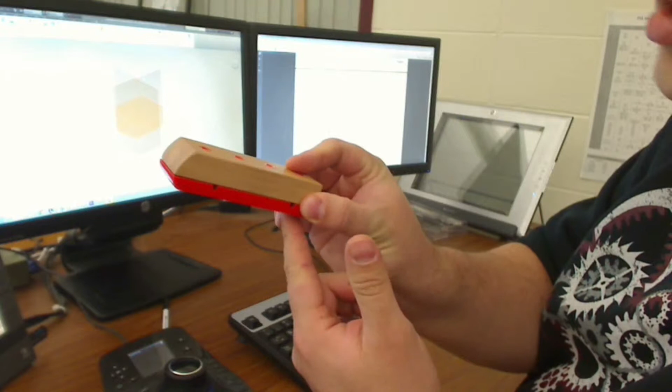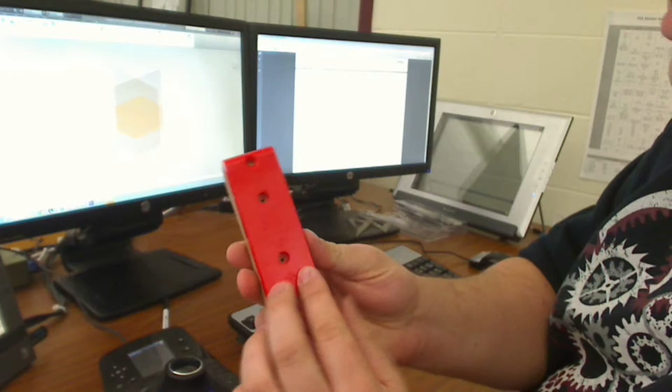Next part is going to be the red plastic base, which attaches underneath the wooden base. Taking the screws out so I can take it apart right now. But we'll start by making a part for the plastic base, which is going to have the same outside dimensions as the wood piece did.

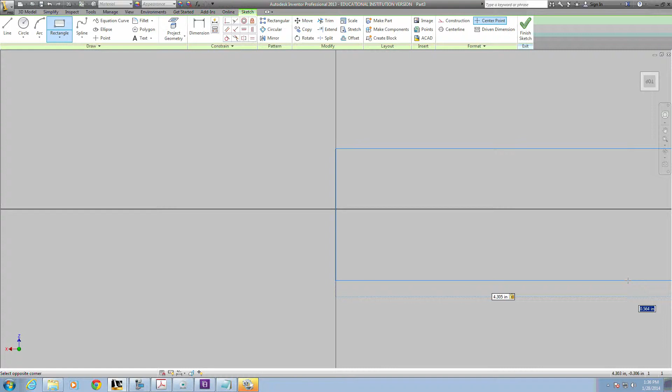So in a new part, I'll create a new sketch on the XZ plane. And again, I'll draw a rectangle that's going to have dimensions as before. I'm going to not start on the origin though. My length is 4.305 and my width is 1.565.

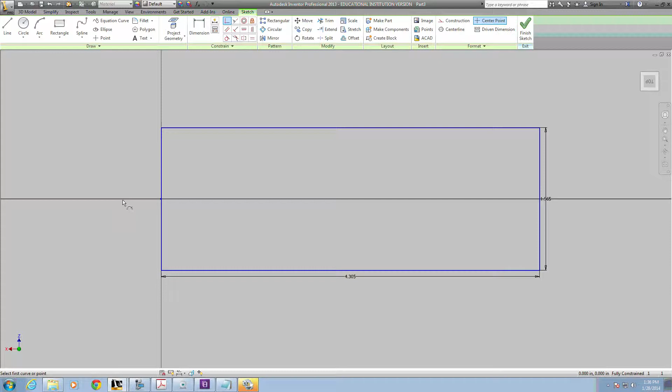The reason I didn't start in the origin is because I want to constrain the center of this line to the origin. So I'll use the coincident constraint on the center of the line, which will be a green dot, and then go to the origin and constrain it there. That way I now have what will be an origin plane that will be in the center of my object here. Finish this sketch and I'll extrude this sketch 0.31 inches, which is the thickness of that part of the red base.

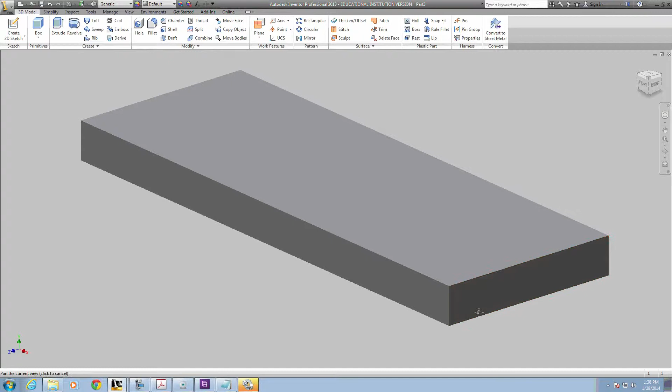And then the front end of it has a round over, which I'm just going to use a fillet for. The front edge will be the same thickness as the shape, which will be a 0.31 fillet.

Then looking at the red base, we see that it's actually hollowed out on the inside here. It's just a thickness of 1/10 of an inch to the material, and that's hollowed out here. So I'm going to use the shell tool in order to do that.

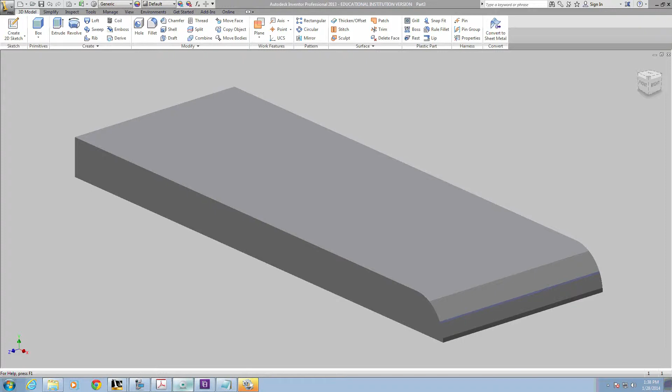I'm going to go to the underside of it, and using the shell tool, which has a default thickness of 0.1 inch, I want to click on the surfaces I want to remove, which would be this bottom surface here, and press OK. And that now has cut out the excess material from the inside of it.

Now the next step is going to be to put these posts and holes on it, which line up with the wooden block. I could measure these and put those in, but in order to make sure they're exactly where they're supposed to be, I'm actually going to create an assembly with the two pieces at this point, and then use the holes that I already put in the wood block as my reference points for the posts and holes in the red piece. So I'll save this.

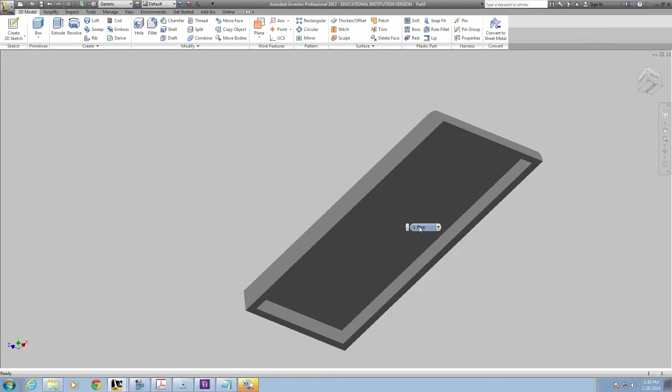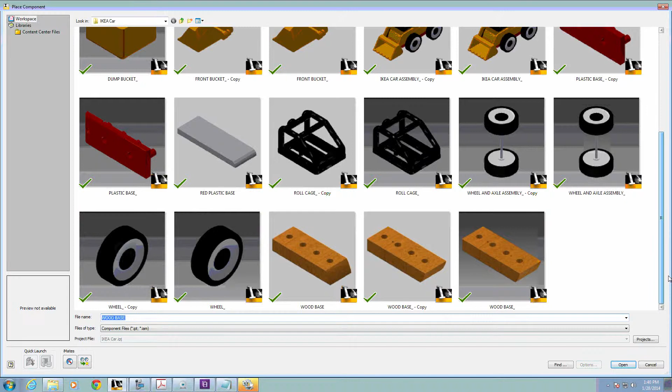Call it red plastic base. And then I'll close this, and then I'll create a new assembly file. In that assembly file, I will place my wood base. And then I will place my plastic base, at least how far I have it so far.

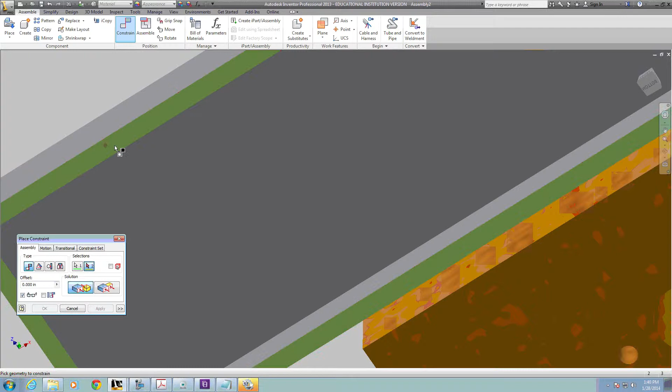And then I want to constrain that to the wood base. I'll do that with 3 constraints. I will constrain the bottom edge to the surface here, the mate. And then I will constrain the back to the back with a flush, and the side to the side with a flush. Now I have that constrained on here.

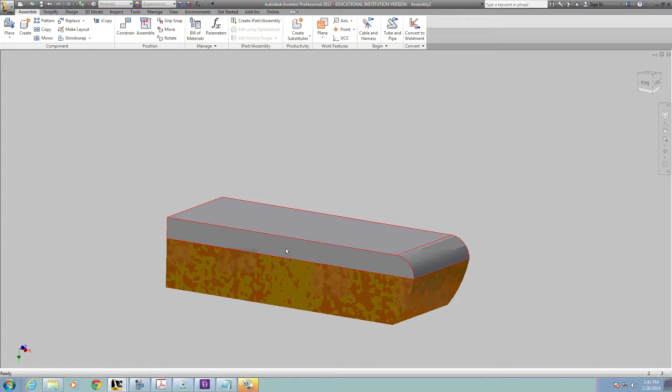Now what I'm going to do is I'm going to get into editing this part, this plastic base I was working on, by double-clicking on it. And now I'm going to project the geometry of these holes onto a new sketch on the bottom of my base. So I'll go to Create a 2D Sketch and click on here. And then I'll click on Project Geometry.

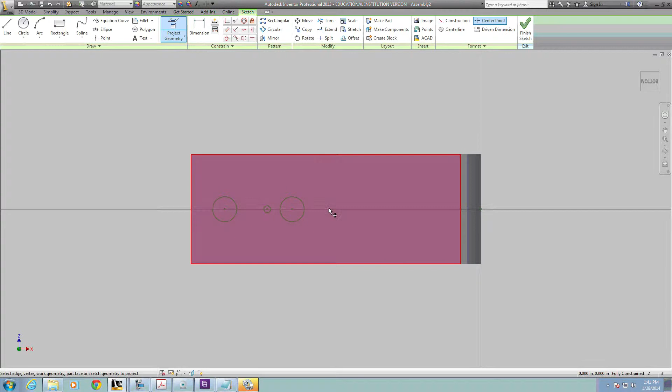And I want to find those holes which are on the other piece. You can find them by just hovering over it, and then we'll find the holes. I could also just change my orientation to go around to the bottom and see them there. And I can click on it down there. Either way works.

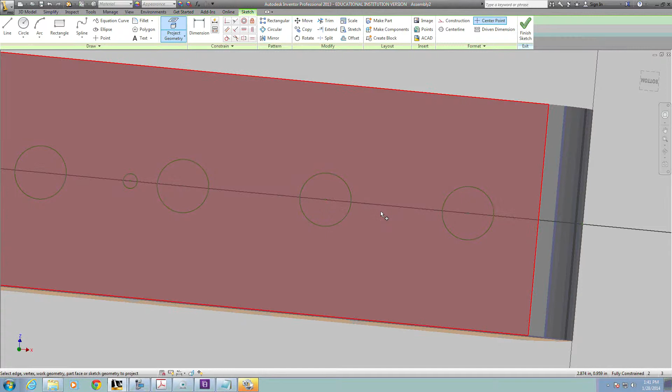And now once I have those holes projected, I can finish this sketch. And I'm now going to go back into modeling in my regular part so I can model the parts from there. So I'll save this assembly so far.

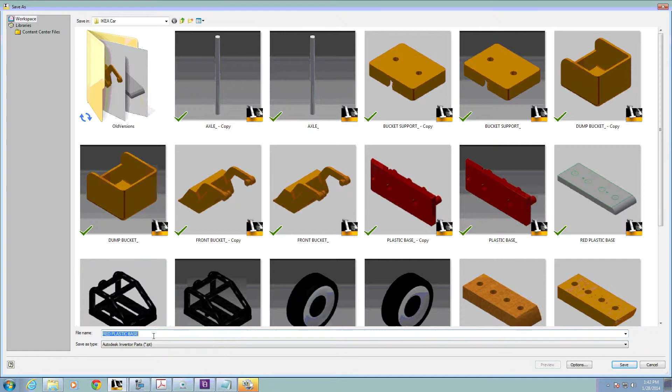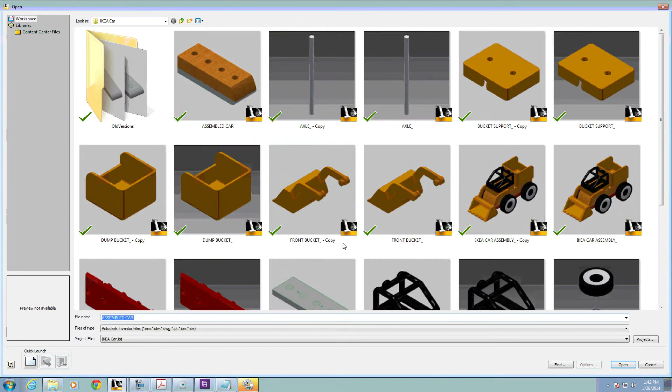So I have to return out of the part here. And then I'll save the assembly that I'm working in. Assembled car. Click yes to all because I'll want to make sure I save the changes I made. And I'll close this and I'll open back up my plastic base. I can see that sketch is there with those holes.

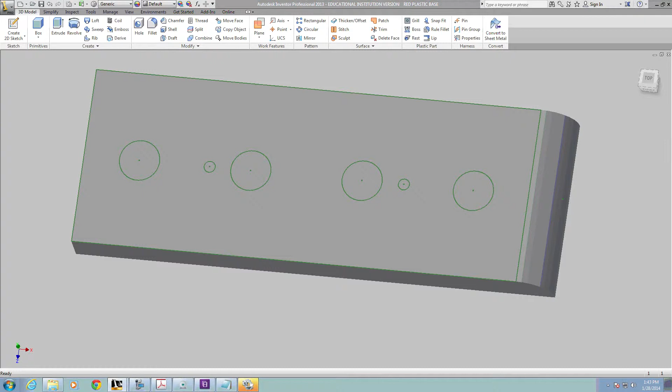Now I can use those locations to help me create where I want the next features to be. Those holes are actually a little bit larger than I want the posts to be. The posts that I want to create are actually going to be 0.35 in diameter. So I'm going to go into this sketch and I'm going to create new circles that are 0.35.

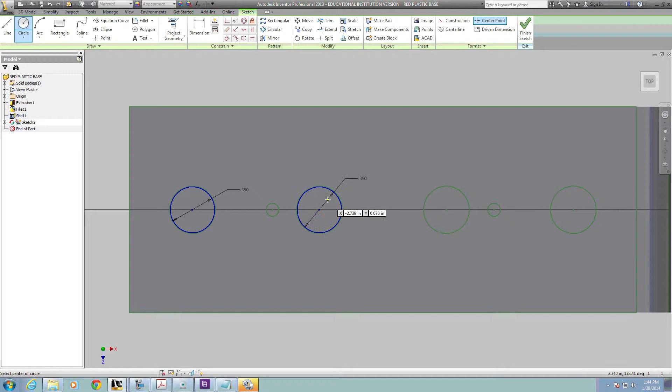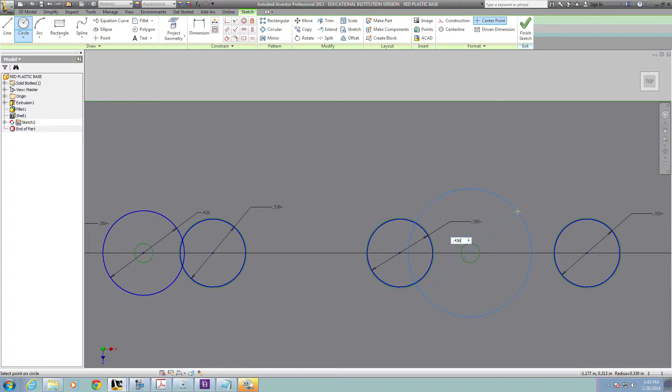As I zoom in, you can see they're slightly smaller than those projected holes. And then the shapes for the screw holes are larger. They're 0.436. So I'll create two circles for those. I want to extrude those posts to go all the way through, which would be the height of the wooden base, which is going to be the thickness here of 0.31 plus the wooden base, which was 0.72.

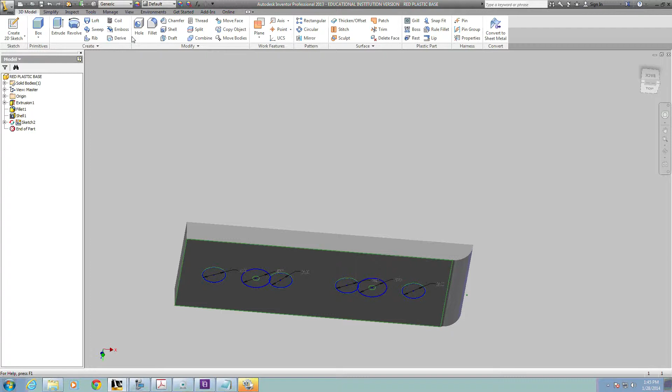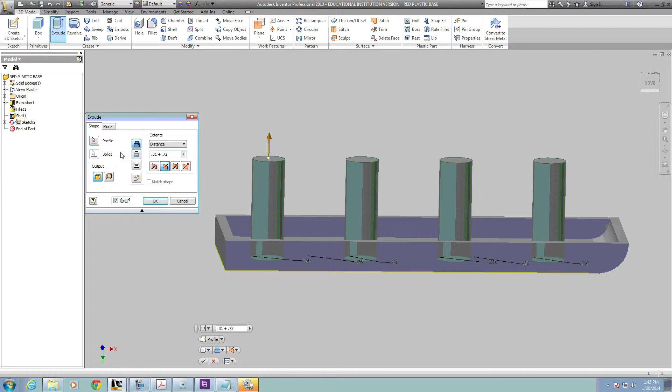So I'll do an extrusion. And I'll choose these inside holes. I want them to go the other direction. And I want them to be added extrusions. So the distance would be 0.31 plus 0.72. Now those posts are created. Then I'm going to go and make that sketch I made visible again. So I'm going to use these other ones as well. These go simply to the height of the plastic base.

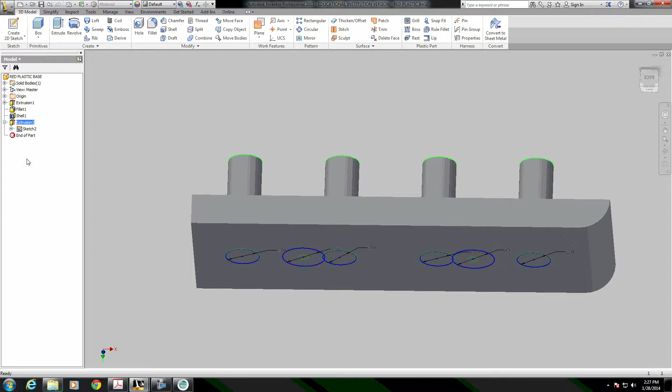It looks like it doesn't want to make a shared sketch while it's an adaptive part. So I'll point out over here in the browser, you can see the double arrow circle there. That means that the reference geometry for this part is adapting to another sketch. I can suppress that for a minute. I'll turn off the adaptive features. And now I can use this sketch again for another extrusion.

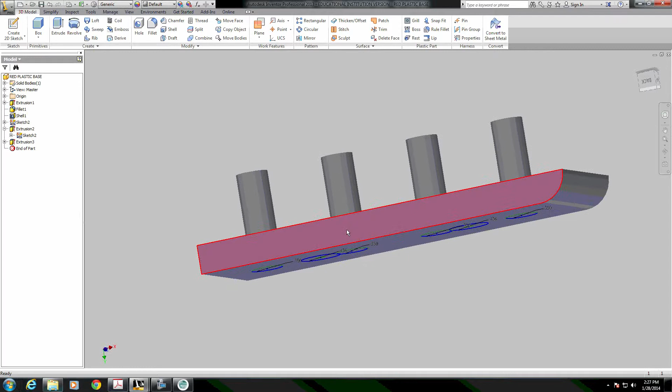I want to extrude these surfaces. I'll do the inside parts as well. I want to go the other direction. And this time I just want to go to 0.31, which is the height of this. And now I'm done with this sketch here, so I'll turn the visibility off again. Just so that I don't make anything not work, I'm going to turn on the adaptive feature of that again.

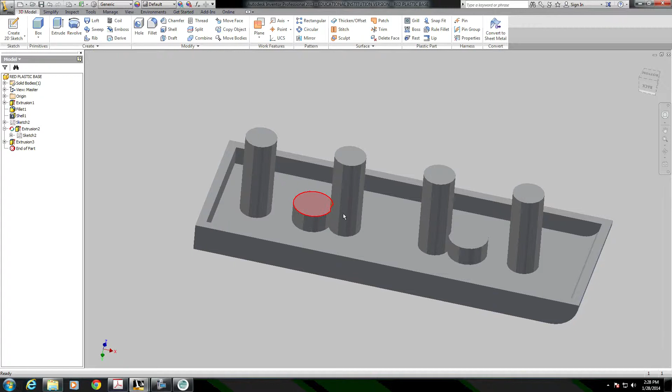Now the next step would be to add some of the holes. The holes go in the post here down to the level of the platform here. There's also holes in these for where the screws go. To make the holes, I'm going to use the same kind of technique where I'm going to make center points. That's just going to make it a little quicker to make the holes.

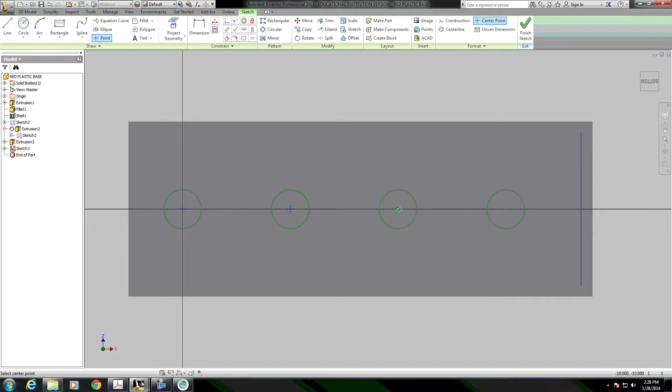So I'll create a sketch up here, and I'm going to project the geometry for these three other circles, and then I'm going to add points at the centers of each of those circles. And then when I go to the hole tool, it'll find those points for me. Now I want to set the parameters for the hole. The holes have a diameter of 0.185, make them a flat bottom hole. And then the depth is going to be the 0.72 plus 0.31.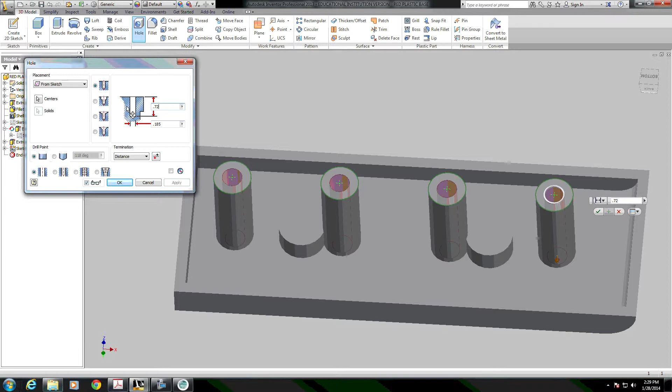That will go all the way through, but I want to back off the thickness of the shell here. So I'm going to subtract 0.1, and that will get me just as deep as where this is here. So I'll place those holes. Then I want holes for these two as well. However, these holes I'm going to place from this side.

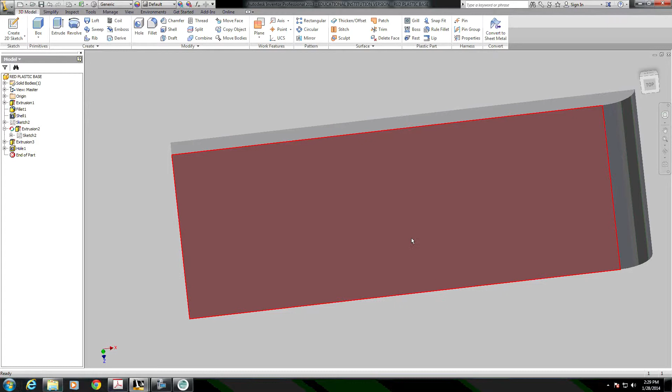So on this, I'm going to make this sketch visible again. And I'm going to create a new sketch and then place points where those two holes should go.

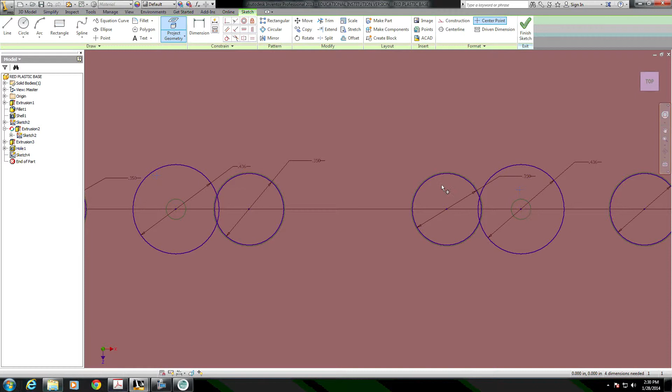I want to constrain those points to the centers of those other circles. So I'll simply use the coincident constraint. Actually, first I need to project the geometry of those points. I think if I project the geometry of those points, I don't actually need those other points. So I'm going to delete those other points. I'm going to hide that sketch before because I don't need that sketch, but I only have those 2 points

where those holes go. So I go to the hole tool, and this type of hole, I want it to be a counterbore hole. I want the holes to have a diameter on top of 0.32. I want them to go 1/4 of an inch deep, and then I want them to go all the way through for the rest, but I want that hole to be 0.158 all the way through.

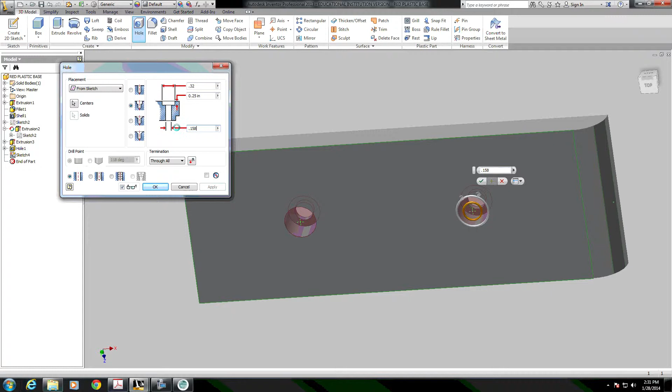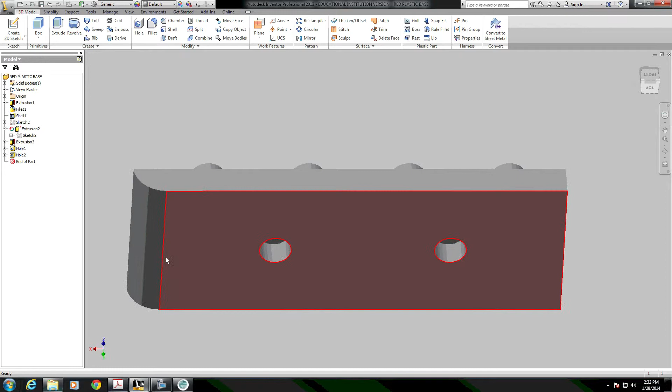And now I can see that those holes are recessed in those little cylinders, and that's what the screws are going to go through to screw into the wood base. There's one more hole on the part, which is a hole sort of towards the front here. I'm just going to place that as a regular hole, place it on this surface. I want it to go halfway across, so I'll do a reference from the edge. The reference is going to be 1.565 divided by 2. So I know it'll be halfway across.

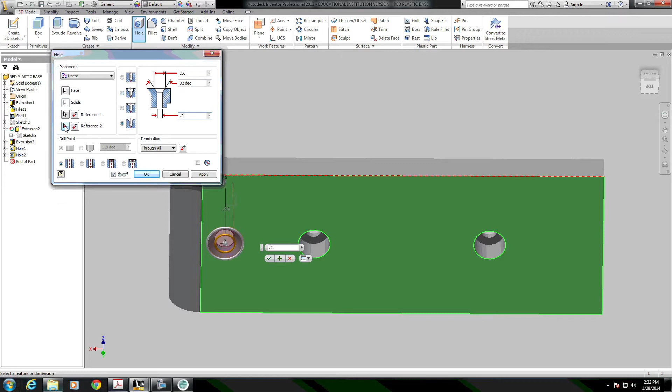It's going to be a countersunk hole because the hole kind of has a little bevel edge to it. The hole has an outside diameter of 0.36, and we'll leave it at the default 82 degrees, and has an inside diameter of 0.2. And then the other reference will be from the very front of the shape, and it will be 0.350 from the front of the shape, which it kind of cuts into the curve a little bit. So then I have that hole, and that is all of the holes I need for this base.

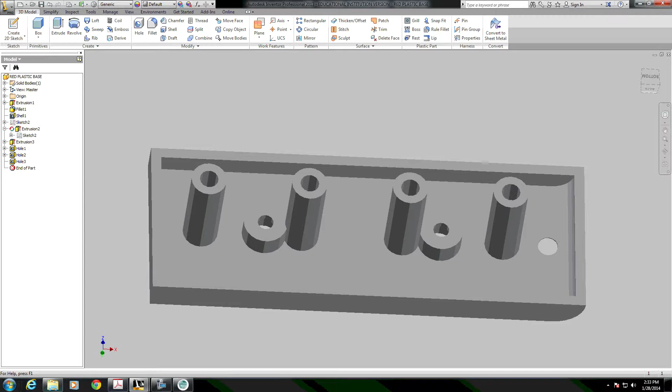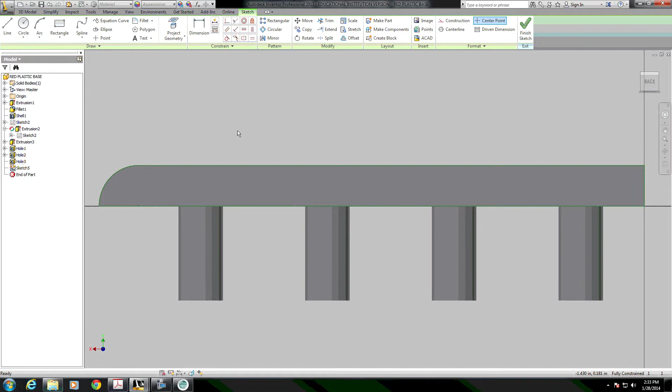To finish this piece, there's one more feature I need to model on this piece, and that's the cutouts for the axles that go across them. So in order to do that, I'm going to create a sketch on the side of the piece. And those axle holes, they're little U shapes, and they are 0.13 in diameter. So I'm going to use the line tool, and I'm going to use the built-in tangent arc feature of the line tool. So I'll click here and go up.

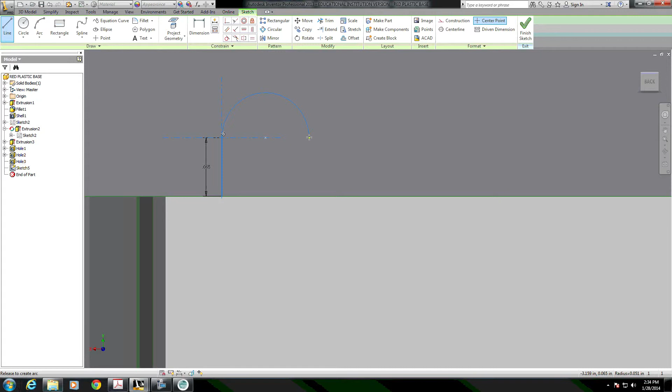It's going to go up half of 0.13. So I'll do 0.13 divided by 2. And then if I click and drag from where I stopped, I can hold the mouse button down, I can get into a tangent arc tool. I'll make a half circle, and then I'll finish this line off. I want to add a dimension because this half circle should be 0.13 divided by 2 for radius as well. I need 2 of those, one towards the front, one towards the back, so I'll make one towards the back as well.

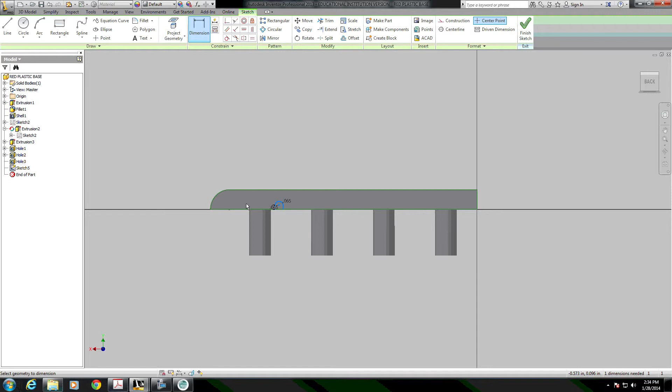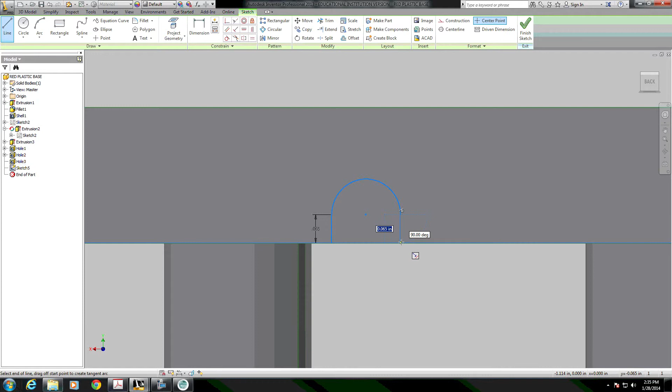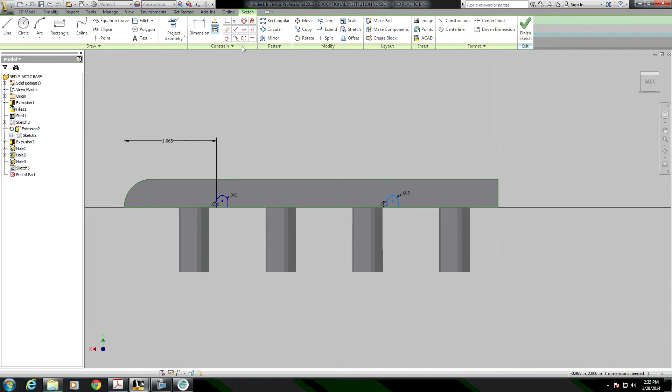Go up 0.13 divided by 2. And then arc, again, dimension here, 0.13 divided by 2. And then to place these, from measuring, I know that the front one is 1.065 from this line to the front corner. And the back one, from measuring, I know to be 0.742.

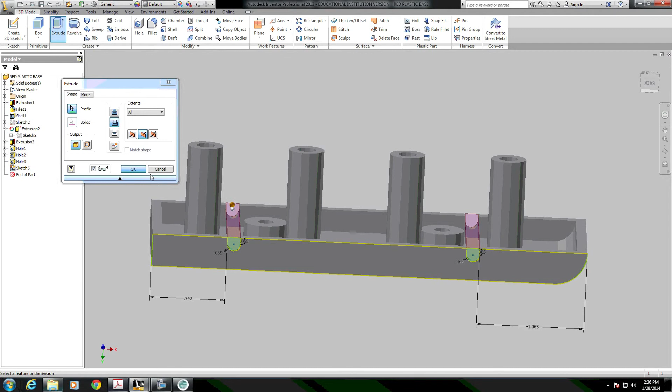Those are fully constrained, so I can finish that. And then I will extrude cut those, and those will go all the way through. So the distance will be all the way through both sides. That's the cutout where the axles will rest. Last thing to make my part done here is I'm going to change the material to a color that looks similar to what I had previously.

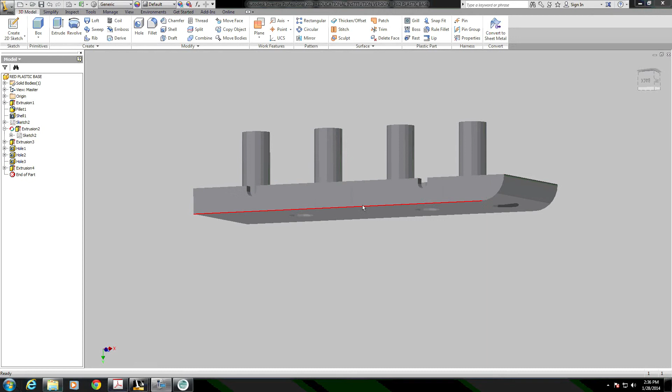Oh. So I'll make it a red material. So to the color here. Change it to red. And that seems to match well with the original. So I'll save this piece.

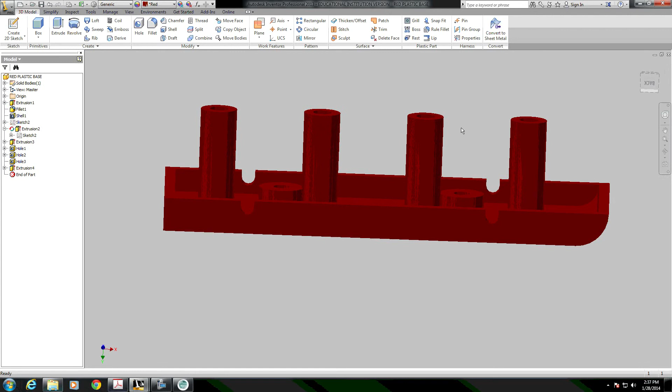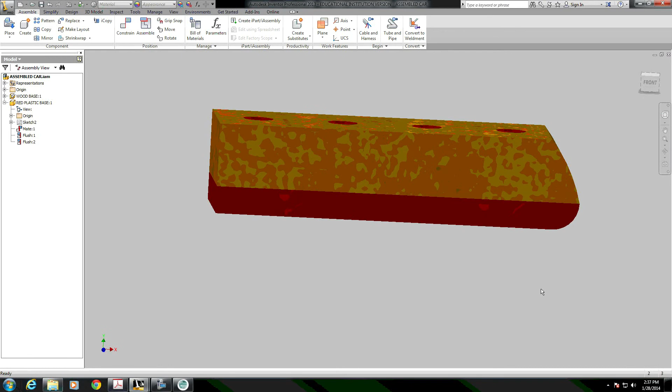And since I already had made an assembly, I'll close this. I already had made an assembly where I put these two pieces together. I can open that assembly. I'll update that because of the changes that I made. And now I can see that all of those features are displayed with my plastic base attached to my wooden block. So right now I'm ready to move on to the next piece.